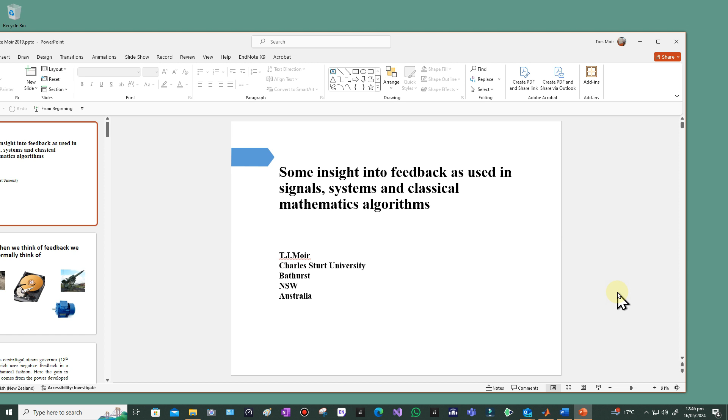Welcome back. I'm going to be looking into the link between many algorithms in use today, recursive algorithms used in a number of areas in signal processing, computer science, and mathematics, and the link to control systems using negative feedback. This is something I've been interested in for quite a long time, but I'm by no means the first person to have looked at this. The history goes back probably to the 1950s, but it doesn't get a huge lot of publicity, maybe because it's a control area that not everybody's interested in.

Let's think about control systems for a minute. When you think about control systems in the traditional sense, whether that be so-called classical control systems that you study in electrical or mechanical engineering, or so-called modern control systems like state space and so on, we normally think of things like hard disk drives, servos for very fast mechanical control, control of motors and machines like induction motors, and control of missiles, which gets into state space and nonlinear control.

That's coming from the early 1960s and late 50s. And robotics, more modern robotics, and walking machines that can run, jump, and do a whole host of things - that's what we normally think of. We think of these engineering applications because control engineering, or control systems, is normally studied by most engineers, even chemical engineers controlling processes for various chemicals, liquid levels, and the like.

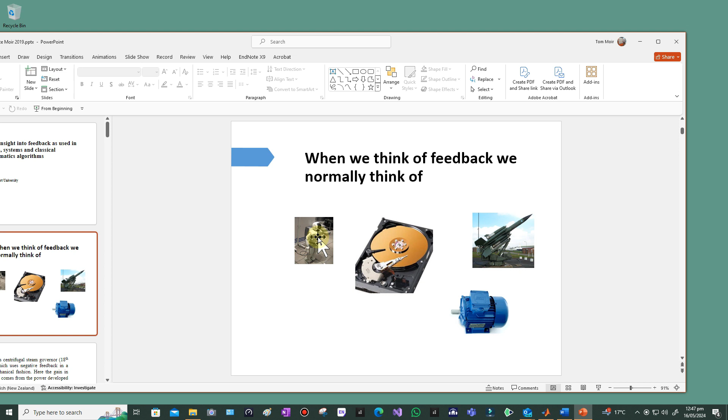But of course, control systems also appears in mathematics - it's just a theoretical topic. But what I'm looking at today is not the normal mathematics of control, but how mathematics itself has algorithms which turn out to be feedback control systems, even unbeknown to the people who invented them. So let's see what I mean by that.

Well, here's some more historical ones going way back. This is machines, the James Watt flyball governor, to control the speed of a steam engine. That's considered to be probably the first ever feedback control system, barring a clock, which has a regulator for the speed, of course. So arguably a clock could be before that. Watt also got this idea, I believe, from mills that were grinding corn and so on - there were similar sorts of ideas there, and this kept the steam engine at a constant speed so it didn't go running off. That's another story, however.

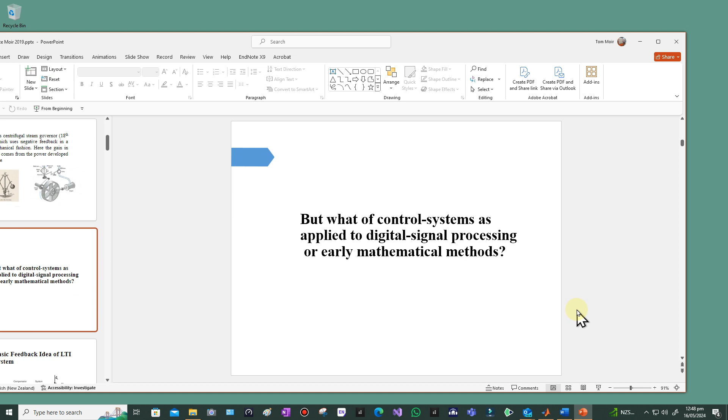So that's what we normally think about. Well, what about control systems applied to signal processing or early mathematical methods? So here's our normal control system. I've drawn this in discrete time in Z transforms. We can do the same with Laplace, or you could use j omega if you wanted to in frequency domain. So this is a linear time invariant system.

We've got our input and our output, so the output's trying to follow the input as closely as possible. We've got our system, whatever that may be, that we're trying to control, and we have to have this compensator, because if we just put feedback around it in a raw state, it won't behave the way we want it to. The output won't necessarily follow the input - it may try to, but it'll be perhaps too slow, so we want to speed it up. When we increase the gain to speed it up, it becomes oscillatory, so you've introduced another problem.

So we need to understand the science, the mathematics behind it, and that's of course where engineers at Bell Laboratories, among other people, designed methods like the Bode plot and other methods at the time, like root locus and Nyquist diagrams. But the Bode plot's still around and still very useful.

The D here is a disturbance that comes in, so if you're trying to control the speed of a motor, for example, this would be something trying to slow the motor down. There could be a ship steering system, and the wind's trying to blow you off course, and the control system has to keep the heading - that might be the heading here, going in that particular direction. What you'll find is that a lot of the algorithms we're looking at will have a system which is just a pure integrator with a gain, or integrators when it's a multi-system with multiple inputs and outputs.

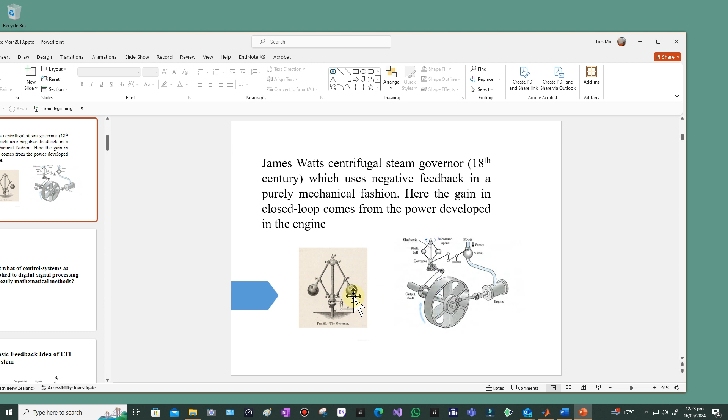The concept of feedback after the time of Maxwell, Maxwell was the guy who analysed, James Clerk, famous Maxwell with the electromagnetic theory, analysed the stability of governors back in the 19th century. It's a little bit hard to follow his paper because it's all differential equations. It wasn't using Laplace transforms, it wasn't algebraic, it was purely differential equations. But he does touch on things like closed loop characteristic equations, although he doesn't necessarily use that terminology.

Whereas Black was on the ball here with amplifiers. He, with his patents in 1937, understood that you could put feedback around an amplifier. What he probably didn't know at the time was how to make it stable. He knew that you could do this, and so you could get a predefined gain on an amplifier. On valve amplifiers at the time, you couldn't necessarily design stable gains. They'd sort of wander around with temperature and so on. That being the disturbance that we talked about earlier.

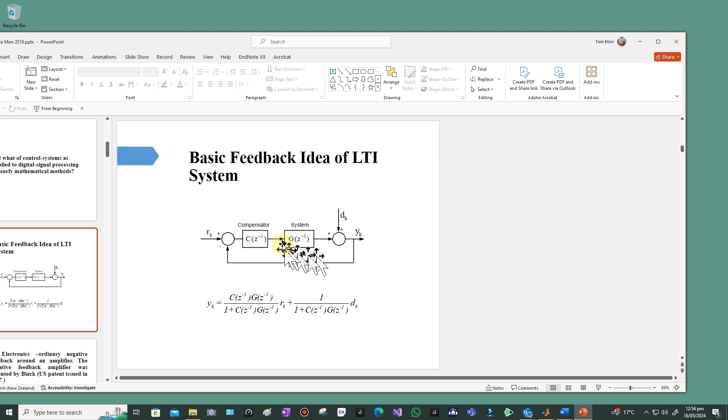This bit here has been the disturbance of the system coming in. So it's getting rid of also noise as well, because the noise reduces when you do this. So Black did a simple equation, this one here, to show that you get that. But what he didn't really probably understand too much is stability, and some of his colleagues like Bode and Nyquist sorted that out. Strange that they were all working at the same place.

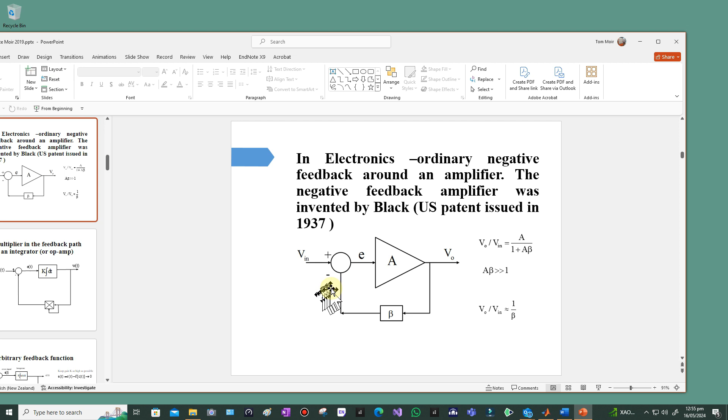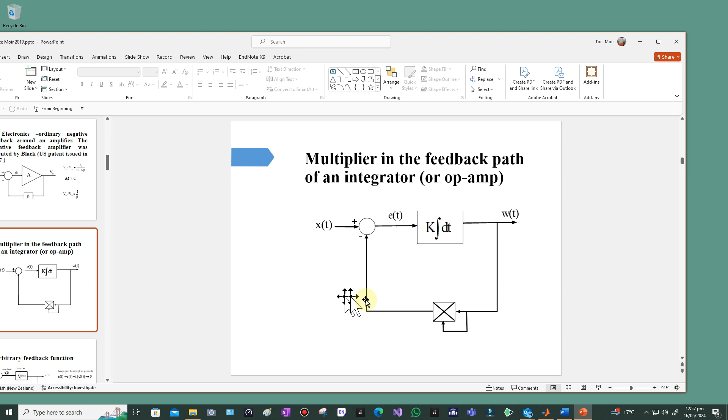And that's been known: any function in here, you get the inverse. The analysis is a very simple one. The error is r minus some function of the output, and you want that error to go to 0, like any control system, so that the output would track the input—but it's not actually going to track the input because it's not linear anymore. But anyway, if E does go to 0, then R must equal this function f of c of t, so c of t, the output, must be the inverse of R. So you get the inverse of the input.

So if you put a number in there like 2, you would get the square root of 2 coming out, and you do. So you could build an analog circuit which gives you the square root, and in fact that has been done.

I may even remember when I worked at GEC, them talking about a square root function for, I think it was one of these fast lifts or elevators to lift coal in a coal mine or something, to get it to decelerate, because it goes at a hell of a speed. To decelerate down to rest, they used a square root function. So it was analog in those days, so they would have used that. But being a student, I didn't fully understand all of that.

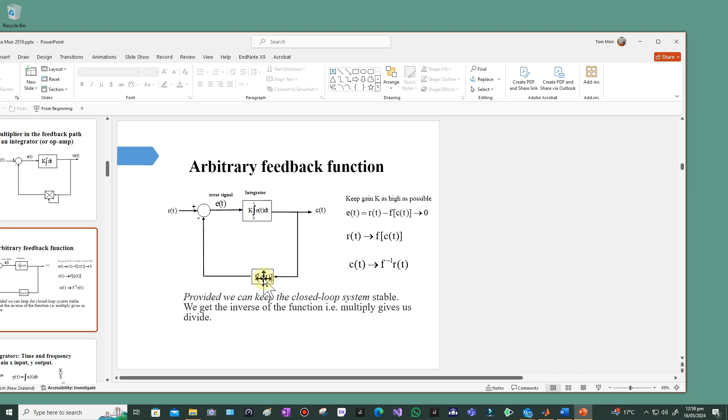K is a gain, which we can talk about later. It depends on the bandwidth of the loop and so on.

So what you actually see in real life is algorithms of this form appearing in the literature. You can spot them a mile off: Yk plus 1 equals Yk plus some kind of gain. Often that gain could be some other vector or something, and y could be a vector as well, times an error, and the error itself could be a vector or a scalar, or even a matrix of errors depending on the problem. So we can recognize integration very easily just by looking at algorithms like this—you know, hang on, that's an integrator, and that's an error, so that looks like a control system.

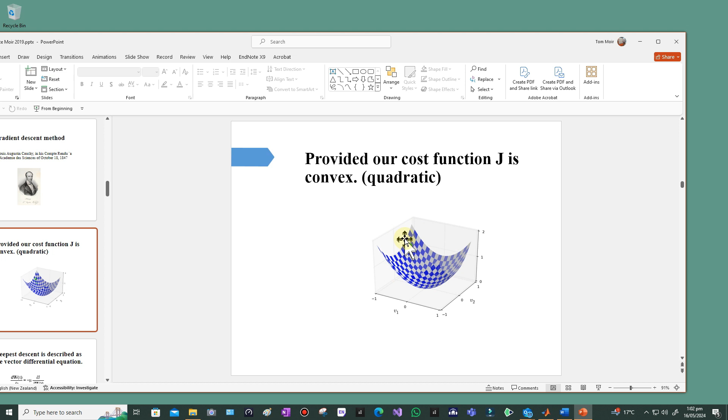It's a very short paper indeed, I think it's just about a paragraph really, almost like he didn't even want to bother with it. But it was on what's called the gradient descent method, and that's an incredibly important area nowadays with neural networks and artificial intelligence. These gradient methods work in a way I'll show you here: they find that you've got some kind of convex quadratic function, and you're finding the way down to the bottom to optimize the function.

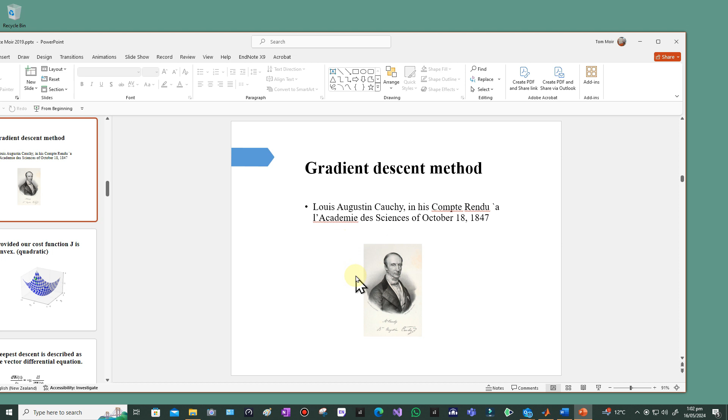This was invented by Cauchy, and he obviously never realized the importance of it, I think, because I don't think he pursued it that much. I might be wrong, but others, of course, did. This is the gradient descent method written in continuous time, which you don't really see very often: the rate of change of the output is constant minus a constant times the gradient.

This is often explained this way: if you're standing on a hill and there's fog and you're trying to get to the bottom, well, the best advice is probably just to stay put and camp overnight. But if you wanted to get down, you take steps, and where the gradient is steepest, you go in that direction, then take another step and look where it's steepest again, and you get down to the bottom the fastest way. I wouldn't recommend it because it could be a sheer drop and you end up dead. But anyway, that's the theory behind steepest descent, and it does work very well.

So this derivative is the actual gradient of the function you're trying to go down, and it's approximated by a differentiator, which can be approximated by this Euler integration: wk plus 1 minus wk over T. Again, if you've implemented a PID controller, you'll recognize that it's a first difference, the simplest form of differentiation you can get. You can get more complicated approximations. T is the sampling interval, and we normally make that 1 because unless we're looking at it as a real control system in terms of frequency and bandwidth, it's normally all normalized to unity sampling.

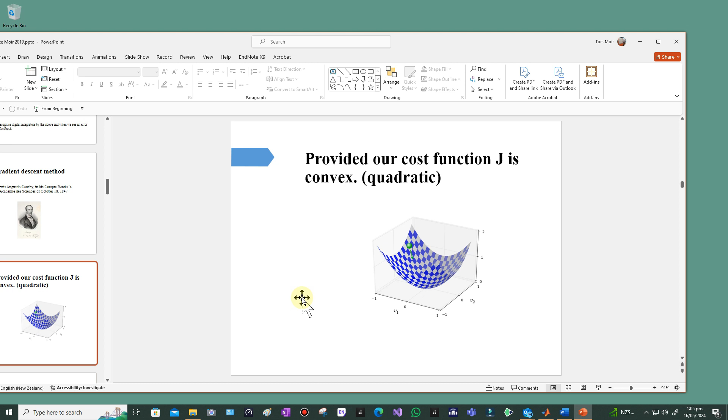So this is the discrete version where you normally see it: wk plus 1 is wk minus mu, and mu is like a gain times the rate of change of the output, which is the gradient. You've got to watch what that mu is, because if you make it too big, that's like having too big a gain in a control system, and it goes unstable. And once again we recognize integration here, because we've got this wk plus 1 is wk plus something. Unlike a simple integrator which is a scalar, here this is the whole vector, or it could be a scalar as well.

But that's the steepest descent method, and it's obviously a control system. Just by the way, you can replace that differentiator with a more accurate differentiator, the trapezoidal differentiator, giving trapezoidal integration. It still looks very similar, but you've got an extra term: dj by dw, the cost function derivative, and dj by dw k minus 1, the previous version. You do get a slight improvement doing that, but to be honest, it's not an enormous improvement.

So obviously with gradient descent, you've got to be careful because the method of steepest descent is not the same as gradient descent—I think that's another thing in mathematics. So we call it gradient descent, really, and it's really this integrator with feedback around it. If you can actually do some analysis, it's just a control system, and we'll come to that again.

Here's another common control system used a lot in signal processing: the least mean squares algorithm from 1960, or the stochastic gradient method. It's based actually on steepest descent, on Cauchy's work, but a slight extension of it, made by Widrow and Hoff, I think it was, in their paper in 1960. So you've got to understand it, it's a little bit tricky, but basically all we're doing here is we've got an unknown system G, and we're driving it with some known input, let's say white noise. I'll explain in a minute why it's white noise and not just any other input.

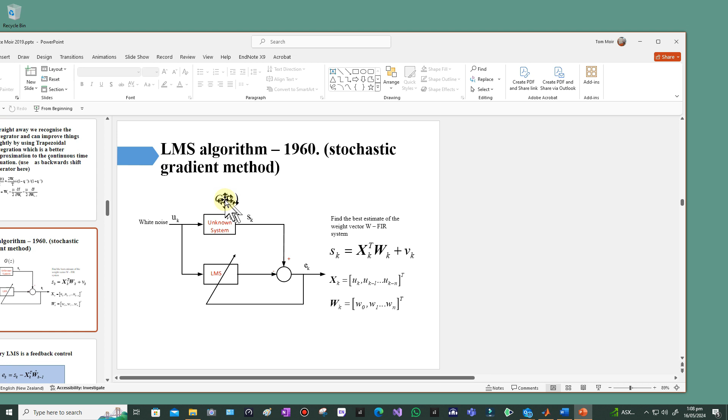There's a whole load of analysis around what maximum value to make that. It's quite interesting - a lot of people just pick a small value. But if the system itself is changing with time, in other words this unknown system's parameters are changing, then that can lead to problems if mu is fixed.

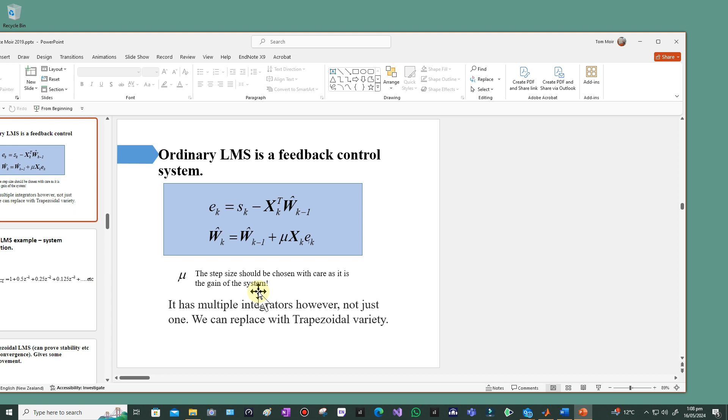Anyway, we've got an error and we've got an update, which we've got an integrator in the loop again with feedback around it. I'll just briefly show you a simulation of LMS - you probably find that in lots of other videos, but here's the least mean squares.

Here's an unknown system, 1 over 1 minus 0.5 z to the minus 1. And if you do, say, long division, or a power series expansion, you'll find that can be written like this: 1 plus 0.5 z to the minus 1, plus 0.5 squared, 0.25 z to the minus 2, plus 0.125, and so on. It gets smaller and smaller and smaller. That's how you can approximate a so-called infinite impulse response filter into a finite impulse response filter.

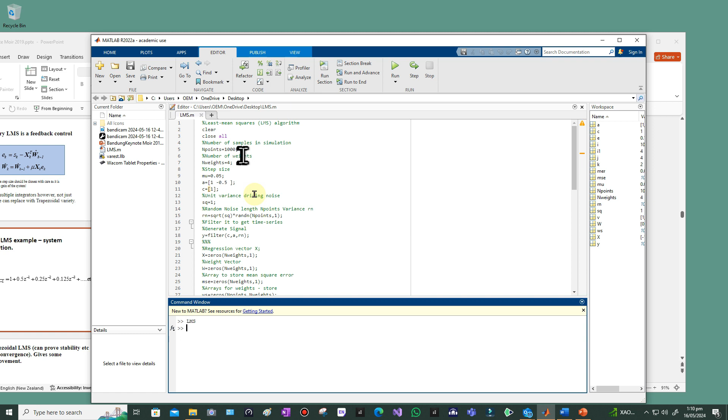So I'll just type LMS and see what should happen. So this is the error - like any good control system, it's going... well, actually it's the mean square error, not the error. Sorry, I'm going to be careful here. It's a mean square error, not the error itself, because the error actually is positive and negative. So it'll look more like something oscillating between positive and negative and going down to close to 0.

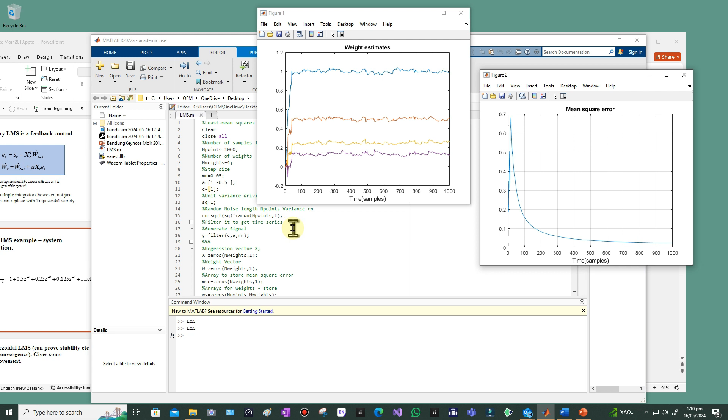Here's our so-called weights: 1, minus 0.5, 0.25, 0.125, and so on. We can make these smoother by decreasing the step size. I've just made mu - I don't know what I've made it, 0.1 or something like that. I can increase the number of weights, so we approximate it to a larger degree. Let's make it 8 and see if it takes that.

Still working, and you see it looks smoother there. There's 8 values now. The reason for that is because as you increase the number of weights, the optimal value, the maximum value for mu, goes down, and so you get a higher overall gain in the loop. The loop gain is determined also by the number of weights, and so that's why it looks a little bit smoother, because it's got a higher bandwidth, if you like, in the loop.

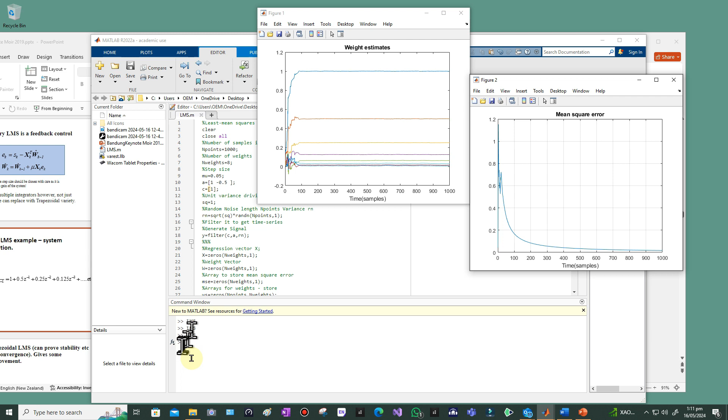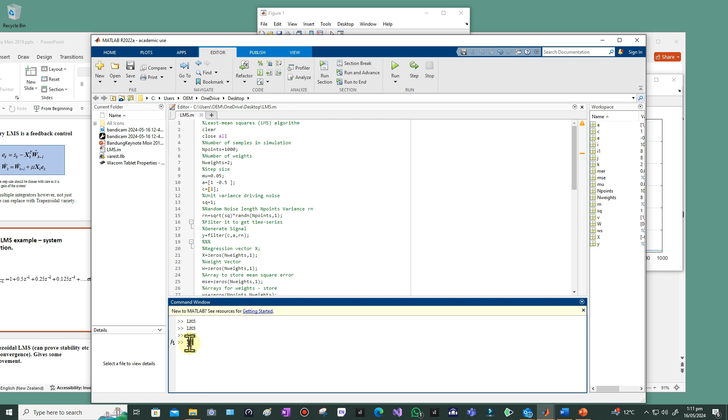And if I reduce the number of weights, it would look more noisy. So if I made it, let's say 2 weights, so it was only 1 and minus 0.5, it should look quite a noisy estimate. Yeah, there it goes - it's quite a noisy estimate.

But on the other hand, I could, if I was to increase mu, make it say 0.1, that's much bigger, assuming it doesn't go unstable.

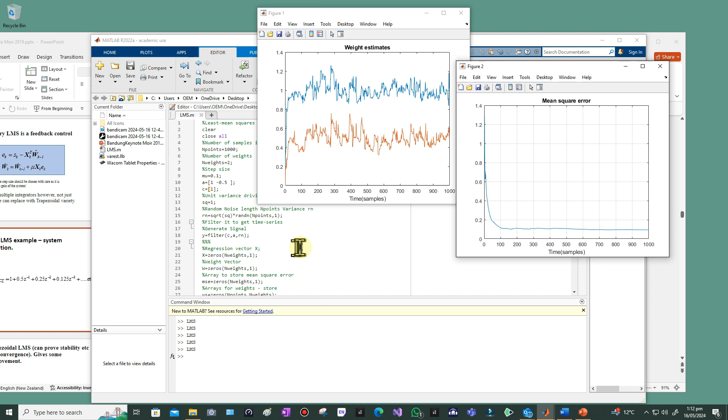Then it should... actually I made it too big there. That's what happens when it goes unstable if I make it bigger. We'll make it 0.02 or something like that. Oh, I can't remember what it was before.

0.007, let's say. Should actually be smoother. Oh, it's not actually going to get very smooth. If I make it very, very small, on the other hand, it will definitely get smoother. Actually, that's what I should have done.

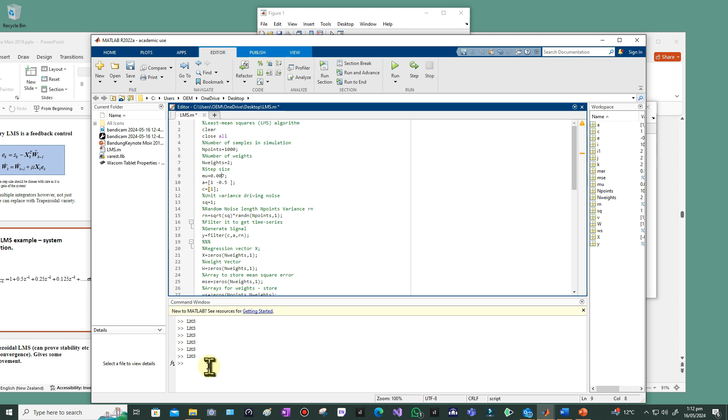But it might not converge in the time given, because I've only given it 1,000 samples. Ah, there we go, so it's much smoother there. Increasing it is the wrong thing to do there.

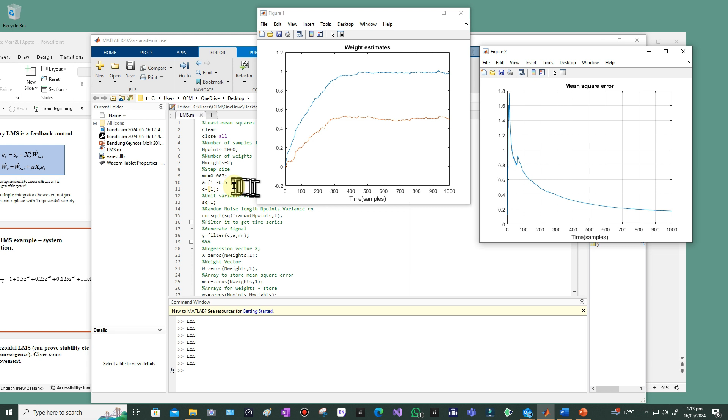It would make it faster converging, but not necessarily smoother. So you've got to watch the value of the gain, and there are ways around this by using what's called normalized least mean squares, where it kind of normalizes itself, and you don't have to worry about selecting the value of mu. I've implemented this in real time a number of times, and you have to be very careful unless you use the normalized version, where mu varies. You are in danger of being unstable.

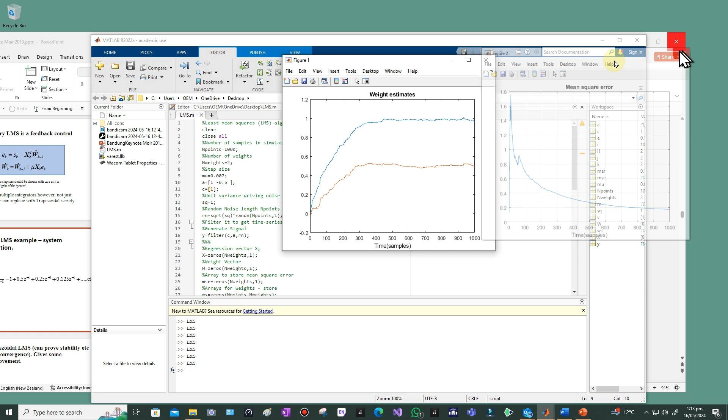So LMS is a kind of control system with all sorts of variable things in it. This is an extension to LMS, where we've put a trapezoidal based integrator in rather than an Euler integrator, and you notice you get an extra term on there. I published this back in 2010. It doesn't give you a huge advantage, to be honest.

I have got a paper written on that here somewhere. Let's have a look.

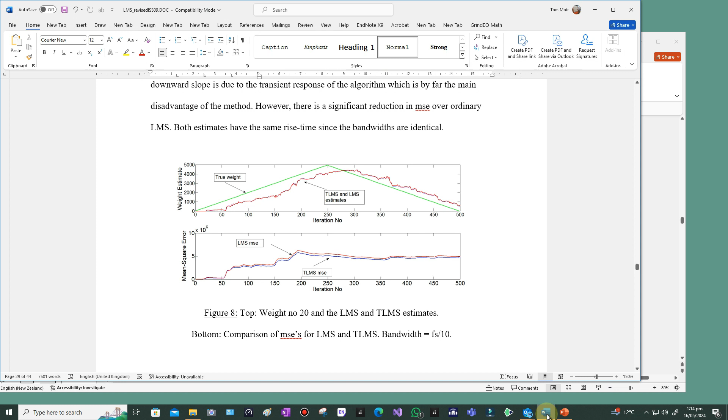Ah, yeah, so you only really notice the difference when you've got time varying weights, really. If it's constant weights, you don't notice the difference. I'll come back to that.

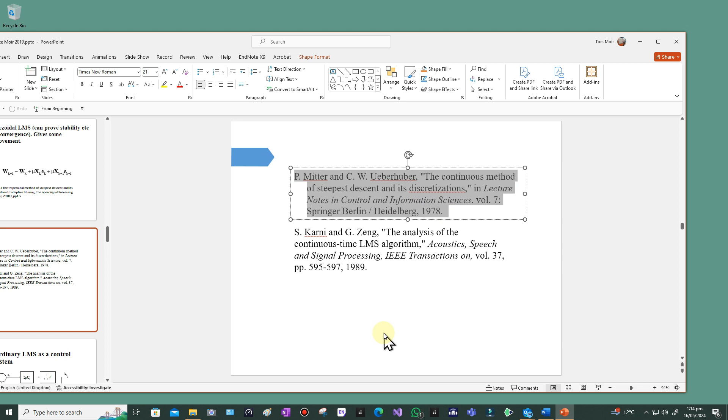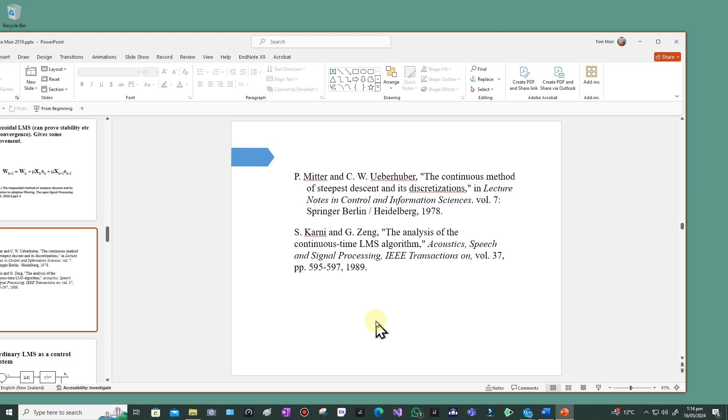So this was somebody who realized back in 1978 that LMS could be written in continuous time rather than discrete time. And somebody analyzed it in 1989. I had a go myself, and I came up with this block diagram for LMS.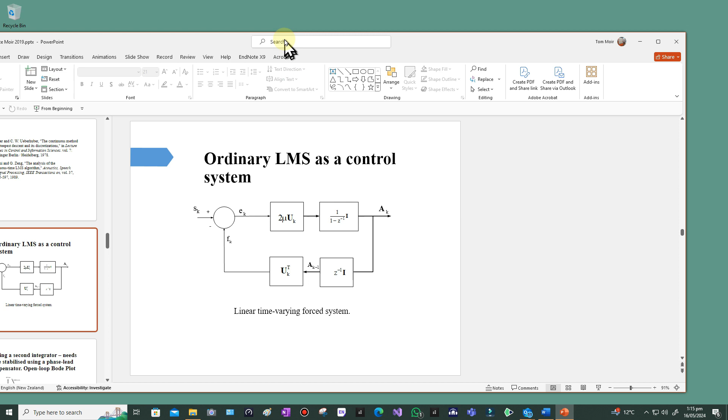What you can do is compensate the system like a normal control system to get better performance. But what better performance would you actually want? That's the question, what are you trying to do. Would you want to try and make it faster? You can't really do that, but what you can do is make it better at tracking time varying weights.

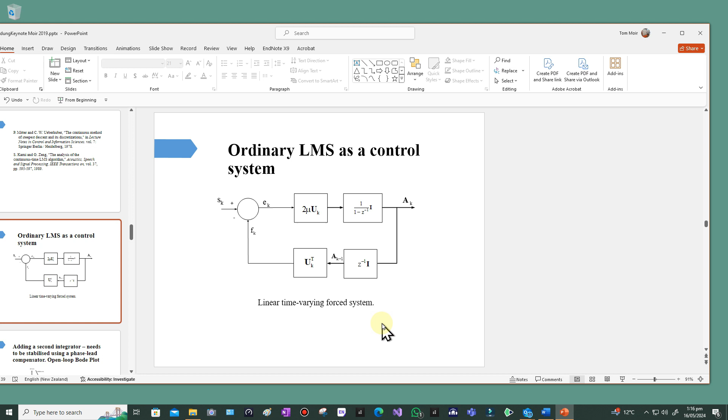Time varying weights isn't quite so common when you look at the literature - they normally have constant weights, but in real life systems can vary all over the place. I was looking particularly at difficult cases where the weights were changing in a ramp formation, and that was deliberate, because control systems can follow steps, ramps, and perhaps parabolas, and how they do that depends on the type of the system, whether it's type 0, type 1, or type 2. So I deliberately picked difficult types of weight variations.

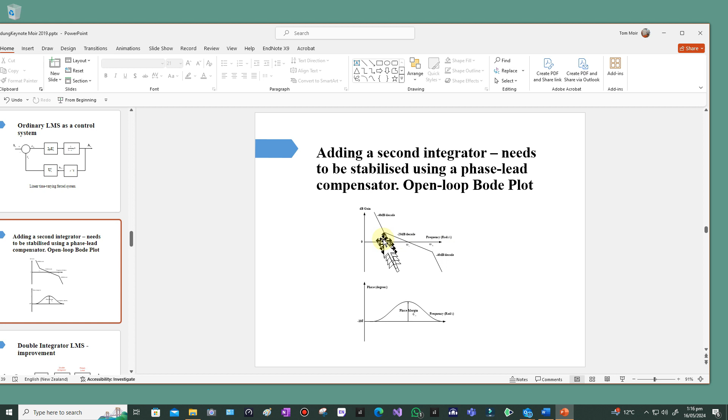So you can add a second integrator to the loop, and if you stabilize it, you stabilize it in this way. This is called the symmetrical optimum, where you have two integrators, then one integrator, then two integrators. So you have minus 40 dB per decade, minus 20 dB per decade, and minus 40 dB per decade, and you get this is our bandwidth here, where you cross over frequency, and you get a maximum phase margin of 55 degrees or so, depending on the ratio of upper to lower frequencies.

That's called the span ratio. You can read about that in my book called Feedback, by the way.

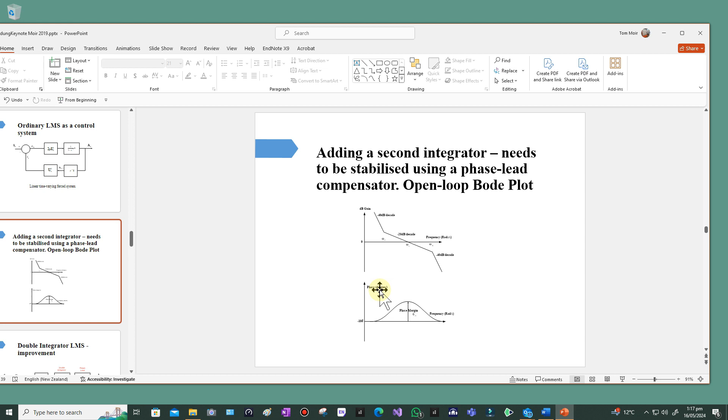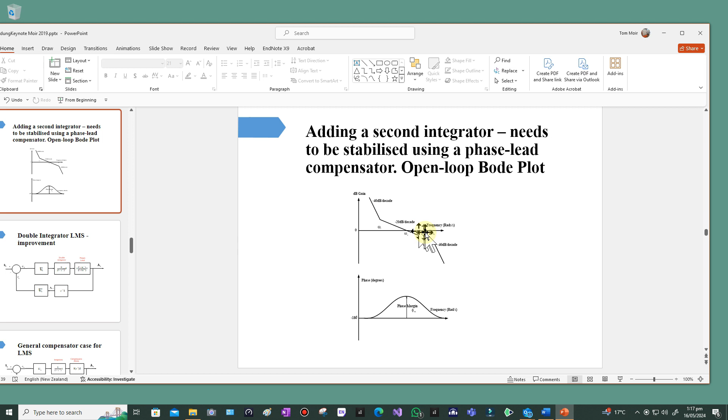So we end up with double integrator LMS, which is kind of an improvement - I'll say kind of because it's got disadvantages as well. What we've done here is instead of one integrator like an ordinary LMS, we've got double integrators here, so there's 1 minus z to the minus 1 squared. I don't know if you can see that. And then I've got a phase advance, that's what's doing the moving from minus 40 to minus 20 dB per decade. Everything else is the same.

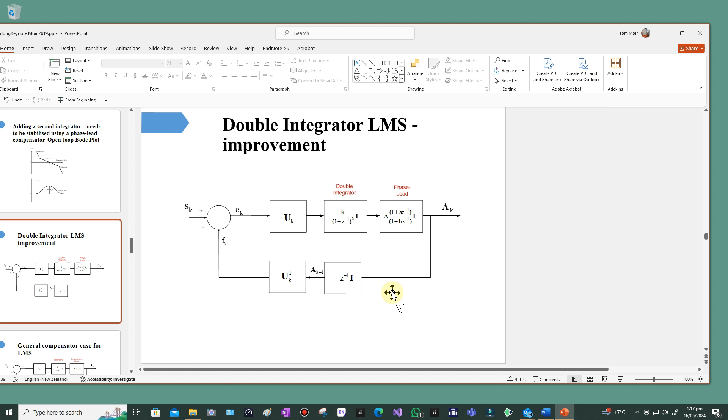Another author didn't look at double integrator LMS, but looked at more compensators of this form - a famous guy called Glover, in 1979, wrote on high order algorithms for adaptive filters in the IEEE transactions. And actually that makes a lot of sense, because when you have two integrators, it's quite hard to control it, and if you're not careful you can end up with oscillations and so on.

I can show you some simulations of that. This is with a 20th order FIR system - you're trying to estimate 20 weights which are all ramping up and then ramping down again. So if this is the 20th weight, just to give you a good example, that's ramping up, ramping down.

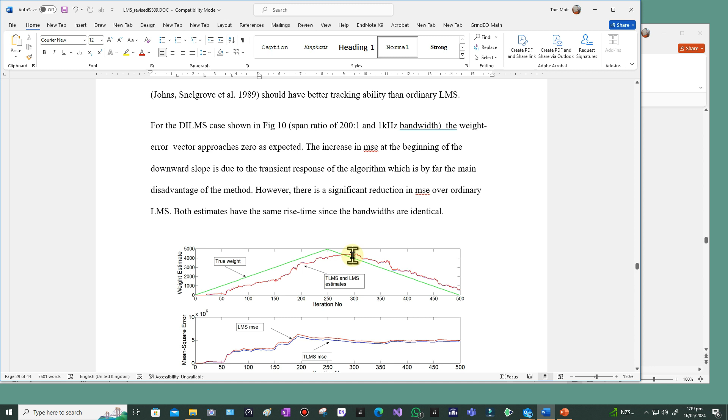LMS and the trapezoidal method behave very similarly. They can't really track it because that's a type 1 system, and a type 1 system with a single integrator cannot track a ramp. If you remember from your basic controls theory, you need two integrators in a loop to be able to track a ramp. The trapezoidal LMS gives you slightly less mean square error, but not a huge amount. But notice, this is classic - it doesn't behave like a deterministic system where you'd normally find a constant error all the way, because it's random inputs, so it's not quite like that.

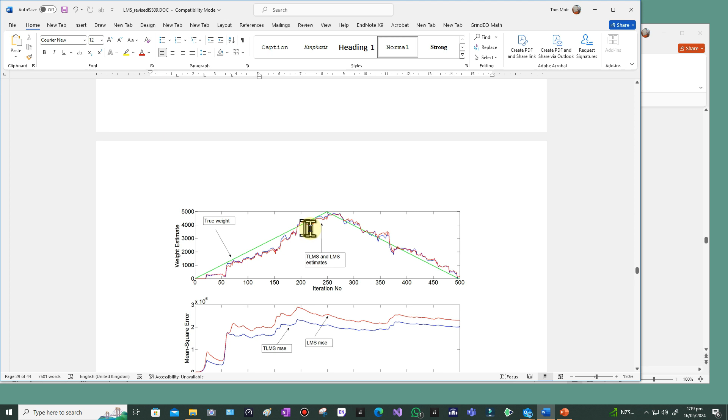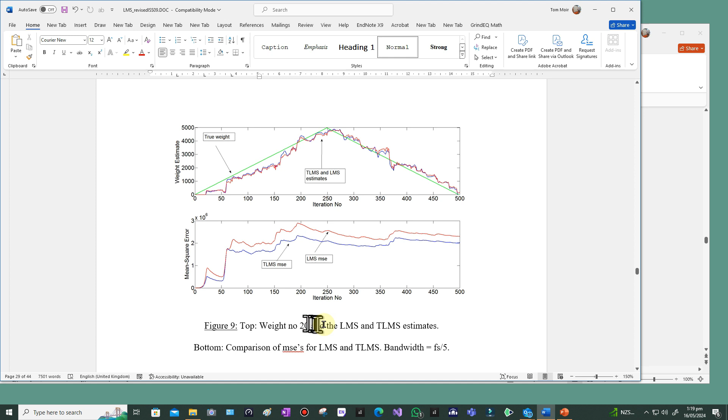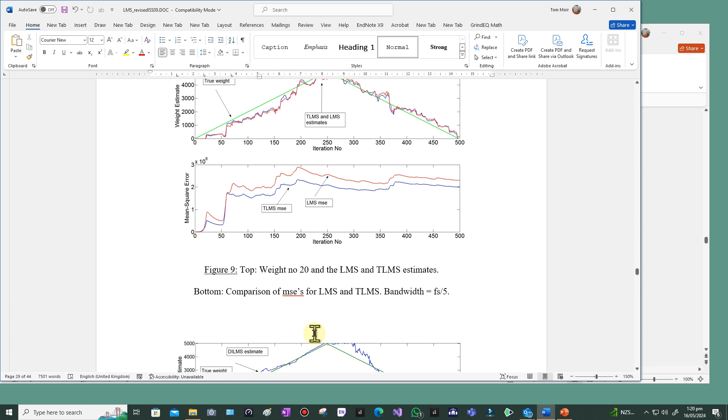But what happens when you put two integrators in is, well, there's still an error, but it does track it much better, particularly here on the downward path for some reason. So, where's the double integrator one? No, oh sorry, this is not double integrator - this is just, I've increased the bandwidth. So this is with a higher gain of the loop. But when you put two integrators in, here's the one.

Then you're ending up sometimes, at least, with DILMS - that's double integrator LMS - ending up with a zero error, but it's not all the time, so it doesn't behave quite like a deterministic system, where a deterministic system would have an error and then it just sort of makes its way to zero. It hasn't had a chance quite to settle down because the weight's changing in the other direction, so it's wobbling about and making its way down to a smaller error there.

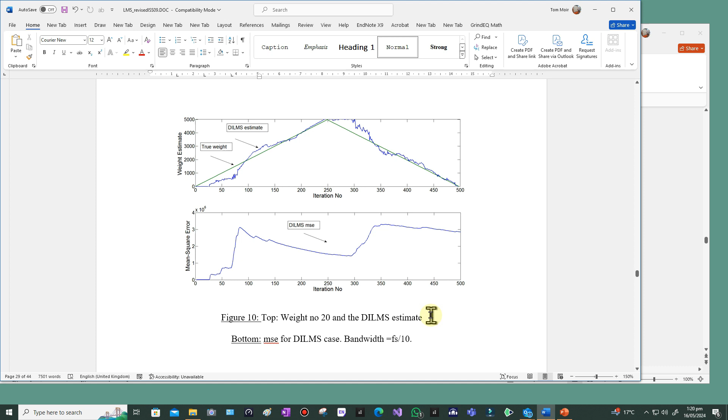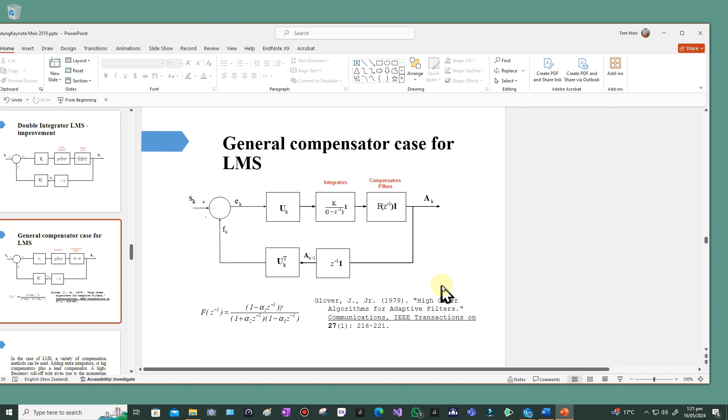So that's with two integrators. You can see how you can improve the loop, but for a lot of practical problems it's really not of great use. It's of great theoretical importance, I think, but not of much use in a lot of real problems because of the stability issues - you really need to keep it stable. There are lots of...

This is just explaining there are lots of ways of compensating in the classical sense. First of all, you can have just a pure integrator in a loop, and that gives you 90 degrees phase margin - it's got minus 90 degrees phase, so it's 90 degrees phase margin. It's perfectly stable. You can stick on a roll-off at high frequencies.

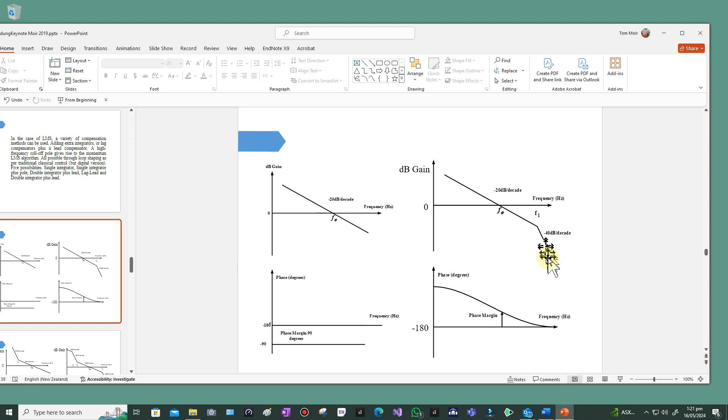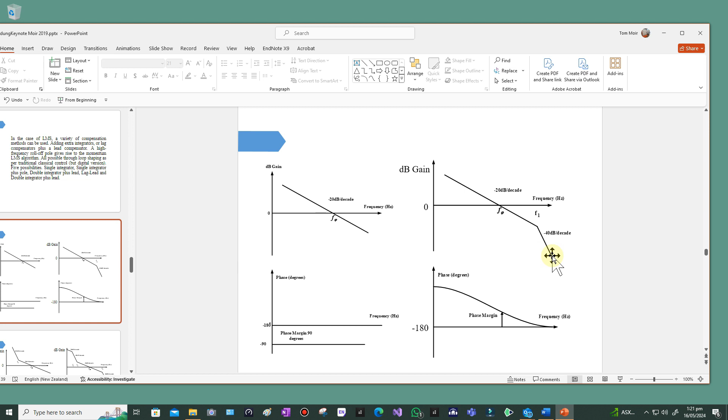This is like a pure lag here, a pole at high frequencies, and that reduces the phase margin, but it would reduce the noise at high frequencies, any noisy terms. That's called momentum, the momentum method - you see that in many papers. They introduce a momentum term, an extra term in their algorithm, and it turns out that's what it's doing actually - in engineering terms, it's putting a low pass filter there at high frequencies, so it should improve things but decrease the stability a little bit.

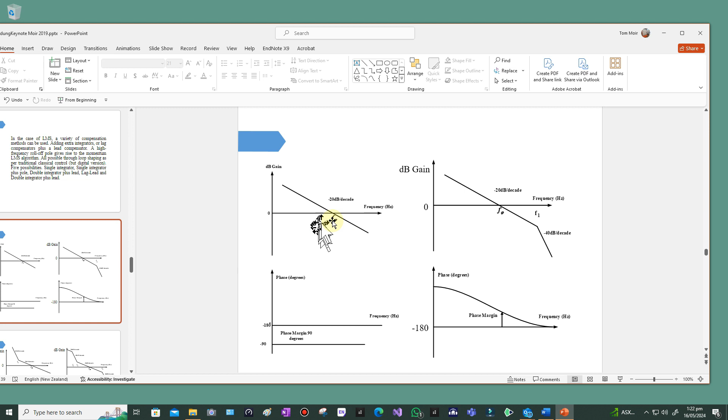And you've got to watch again for your weights here. This is analog, so there's no restriction on bandwidth for a pure integrator in theory. In a discrete system, you're limited by the half sampling rate, so you can't just increase the gain and make the bandwidth anything you like. The bandwidth here needs to be something like, realistically, maybe a tenth of the sampling rate. So if you sampled at 10 kilohertz, you might make the bandwidth 1 kilohertz, and the half sampling, the Nyquist frequency, is 5 kilohertz.

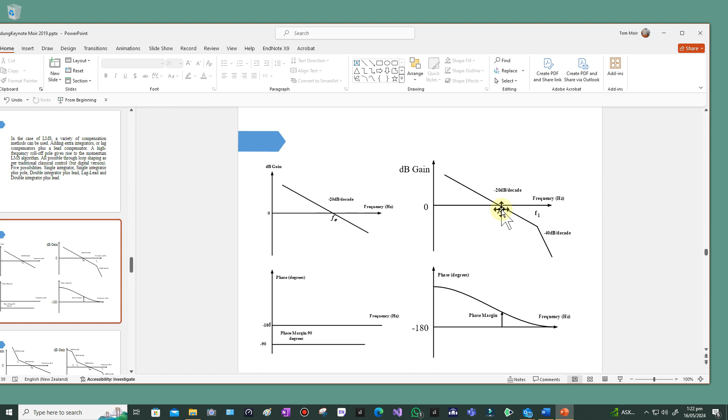Then other things you can do, like here, you can put in a PI controller, so you can increase the gain at low frequencies. This will enable you to follow ramping type weights, which are more time varying problems. You won't get any advantage at all if the input is constant, because with a pure integrator you get zero steady state error anyway. Two integrators you get zero steady state error, exactly the same - in fact, you probably get slight overshoot maybe even with this.

But if you're tracking something that's ramping or changing with time, a PI controller is not a bad idea. You can do something similar. This is here up to this set of frequencies. This is very similar, but then it goes down. It's minus 40, then it goes to minus 20. So that's putting in what's called a lag compensator. If you look in the control textbooks from the 1960s and 70s, you can look in my book as well. That's a lag, and then this bit here is a lead.

So it's a lag-lead compensator, sometimes used in amplifier design and so on. A lag-lead is like a PID controller a bit, except it's not a pure integrator at low frequencies. You see, it's minus 40 dB per decade, but then it cuts back to minus 20, so it's only got one integrator down at low frequencies, whereas this has got two. But they can be made approximately the same, not quite the same.

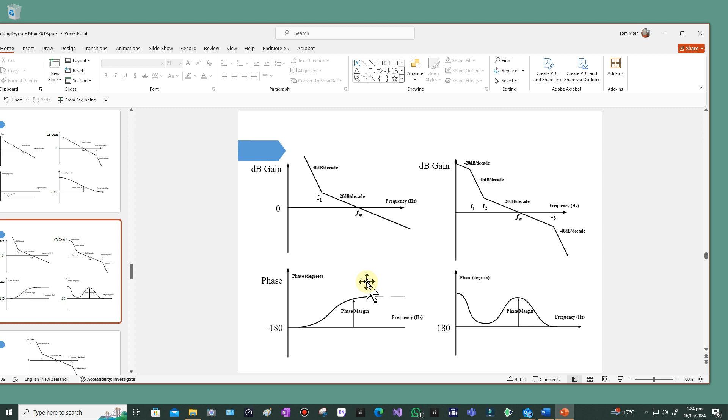And then there's this one, which is probably the one I recommend for sort of motors and things, because when you've got resonances and stuff here - we're not dealing with motors, we're dealing with computational algorithms. So this has got minus 40, minus 20, minus 40. It's the one I mentioned earlier, and that's the one I used when I was showing you the two integrator method in LMS.

This span ratio, the ratio between W high and W low, determines the phase margin. It's usually, if that's about 10 to 1, phase margin is about 55 degrees roughly. If you make it lower, then you get a higher gain for a given bandwidth. Here, at the crossover frequency, you get a higher gain if you make the span ratio lower, but in doing that you reduce the stability because the phase margin goes down.

When you're comparing these algorithms, a mistake I think a lot of people make is because they don't look in the frequency domain, they don't compare like with like. You've got to compare with the same crossover frequency. Just like here, if you are comparing these two systems, you must keep f phi, the crossover frequency, the same in both cases, and then you check it for disturbance rejection properties and so on.

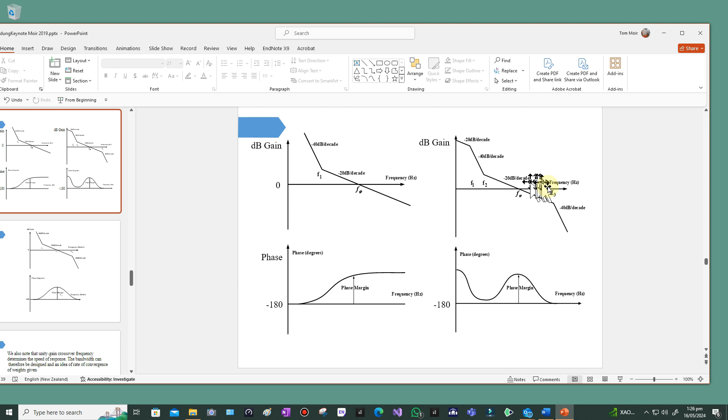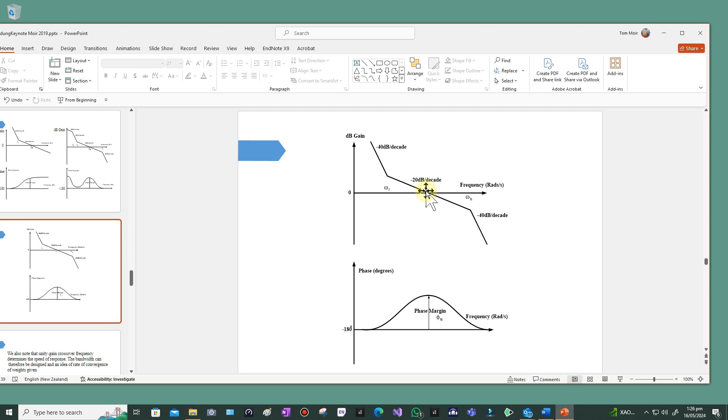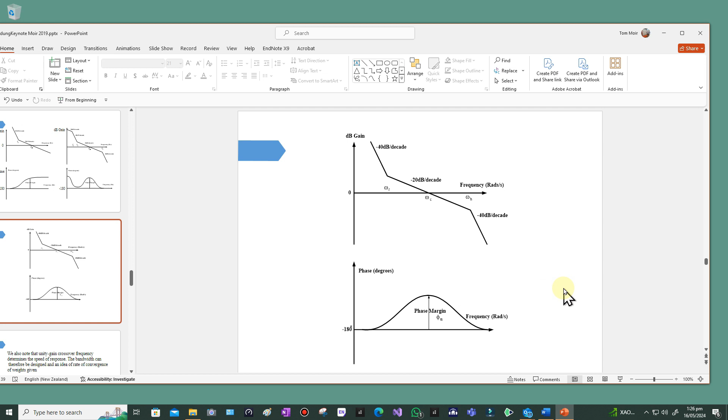So the speed of response will be the same for both of these. It won't be any faster, that one. This one has the ability to be faster, however, because you can increase the bandwidth a bit without running into trouble with the phase margin, whereas here, if you increase the gain, and you come down at -20 here somewhere, then the phase margin will be reduced - let's say it cuts here as the crossover. Likewise with this one, if the gain's not sitting exactly where it should be, you're in trouble either way. If the magnitude came too low, the phase margin would be down here somewhere. If it was too high, it's up here. So it does present a problem, even though it's interesting to check the theory that in fact that's how these algorithms do behave, just like a control system, even though they're time varying and so on.

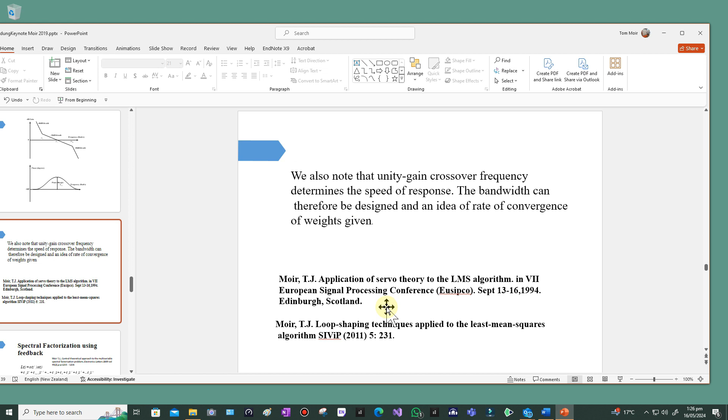As I've just said, the gain crossover frequency determines the speed of response. And this is a really old paper here.

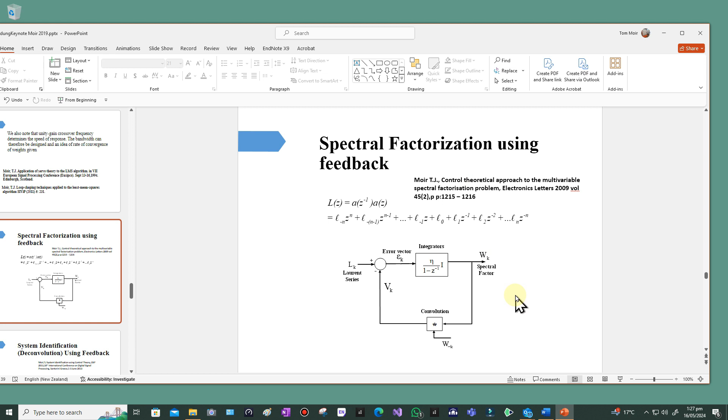You can do, with feedback, you can also do spectral factorization. I looked at that - those of you that are into Wiener filters will recognize that. This is called a Laurent series. I had a paper on that. Some other authors questioned the convergence of it, which was interesting. But it's like a lot of these things, like even in Newton's methods, which have also got errors in them, of course, and an error term like in feedback - they're not guaranteed convergence either. So not all these methods are guaranteed convergence. But the LMS, of course, is, because it's provided you keep the gain below a certain amount.

You can also do deconvolution, but it's not very successful either, because it doesn't take account of the noise in the system. It's for deterministic systems it works, but nothing's really deterministic, nor noise free. So this is convolution, and if you put the system in, if you do a mirror of the FIR filter here and put it in the feedback path, you end up with the opposite of convolution - so convolution is in the feedback path, and you end up with deconvolution, which the control loop forces the opposite. Just like I said earlier, whatever you put in the feedback path, if you can make it stable, you get the opposite, but you have to make it stable.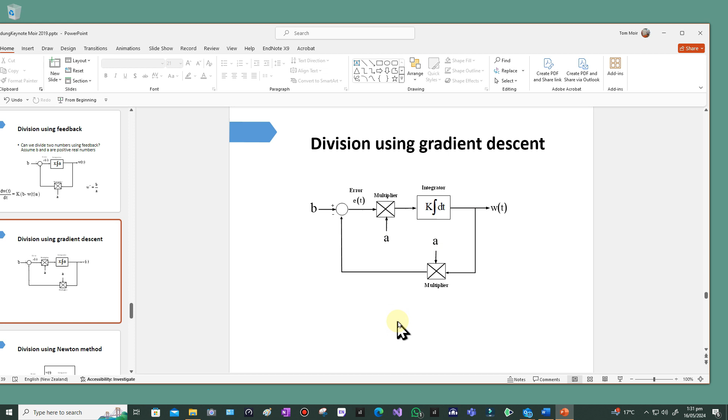You can use Newton's method, and you'll see that Newton's method turns out to be a control system as well. But it's got this strange feedback from the output feeding back into the error, which you'll never see in a normal control system, at least I've never seen it, but you might think of it as some kind of nested loop within the loop. I suppose you can see it, but it's not got a summing junction, it's a multiplier in there.

And that gives you the fastest convergence because it's quadratic. That means the error goes down, for every step, when it's in discrete time, as the square of the previous error. So if it starts with an error of 0.5, it goes to 0.25, 0.0625, and so on very quickly. You can extend this to higher order methods, a sort of extended Newton, where you can have quartic convergence and end up with multiple loops and so on.

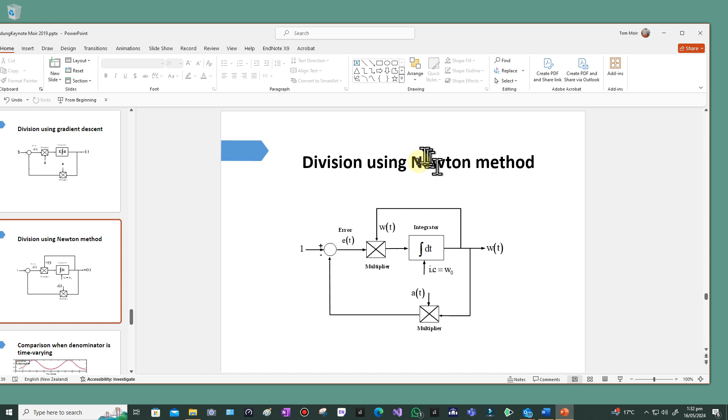But here we can investigate tracking with the gradient method. This is the control method, just with straight feedback. And this is division, 1 over a time-varying parameter, so this is the A term, varying with time. It's got to be offset because otherwise it can go unstable with one of the methods, so I've had to make it always greater than 1, the A term.

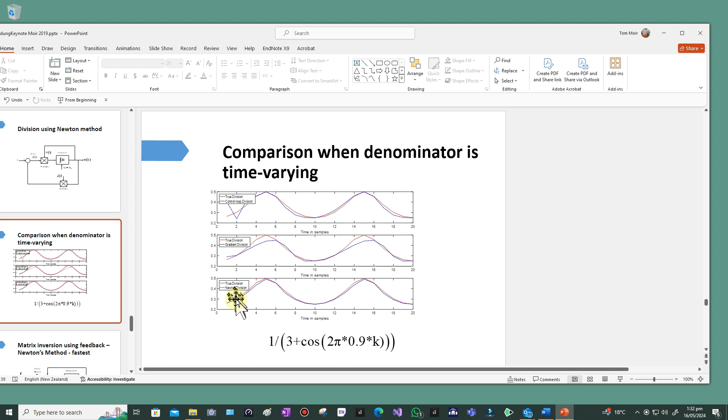But just to see which is the best, it goes without saying that the Newton method here has the smallest error, the best tracking. You can see the Newton method is the blue here, and it follows nicely the true division, the true value of 1 over 3 plus cos 2 pi times 0.9k, which is the red, and it's tracking it really well.

The gradient method due to Cauchy is a bit slower, you see, it doesn't quite keep up with the Newton method. And the control method actually is surprisingly not bad, it looks almost as good, doesn't it?

It shouldn't really be. The trouble with the Newton method is you've got to be careful of the initial conditions. If you don't start it off in the right place, it'll diverge, whereas the gradient method doesn't care about that, and the control method doesn't care either. But the Newton method should generally give you a lower error, you can see it is a lower error.

When you've got time varying inputs, that's when these methods come into their own, and you can see another way around solving the problem. Not when everything's constant - then it's just the classical mathematical approaches, and you use the usual methods. But in a lot of engineering problems, we're dealing with matrices that are varying with time.

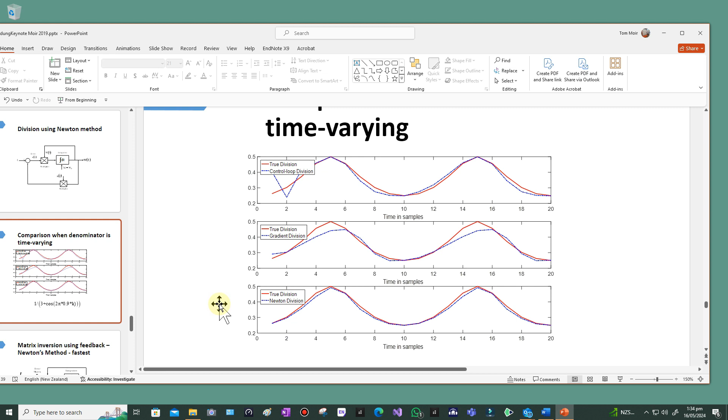Due to inverse kinematics and whatever, you're trying to invert matrices. Mathematicians have a fit when you say you're trying to invert a matrix, even though they've developed all these methods for inverting matrices. The last thing they want you to do is invert a matrix, especially when solving a set of linear equations - they prefer other methods. Direct inversion is considered a big no-no, but engineers perhaps don't agree.

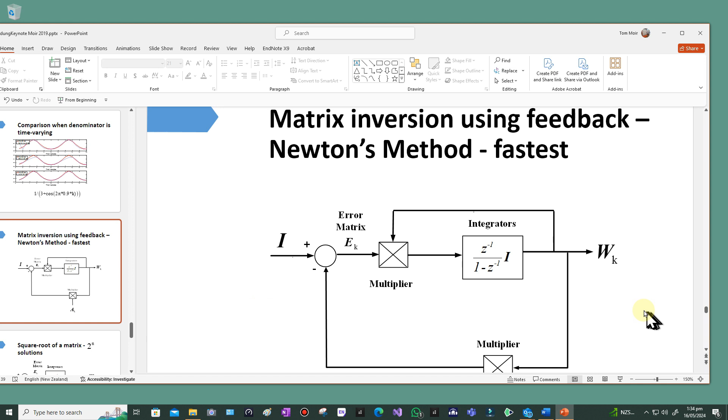So we can do the same. We can invert a matrix using feedback, which is quite interesting. Instead of 1, this is an identity matrix going in here - it's actually an error matrix here. We've got our multiplier feeding back, and these are an array - it's a diagonal array of integrators.

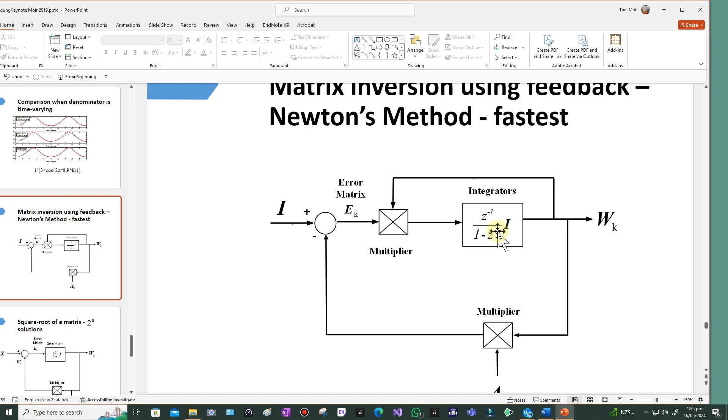As many as the order of the matrix. So if there was a 2 by 2 matrix, you would have 2 integrators on the diagonal terms - a 2 by 2 matrix with, on each of the diagonal terms, would be a single integrator. So it's z to the minus 1 over 1 minus z to the minus 1.

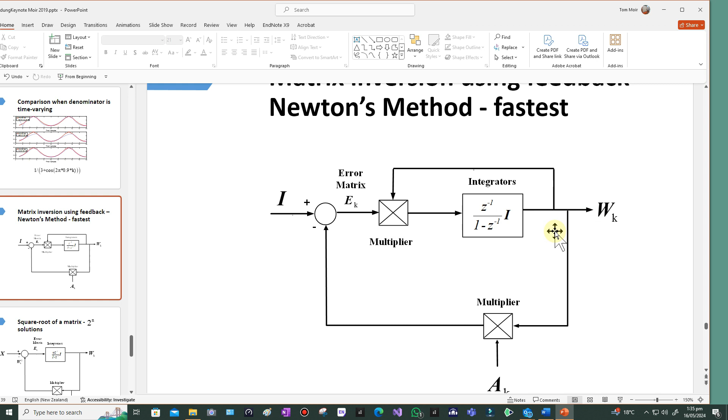The z to the minus 1 is for physical realizability. In a discrete control system, you need at least one step delay between the input and the output. A computer can't respond instantaneously - it needs at least one sample. It might seem instantaneous to you, but it's not like analog. You could do the same with analog.

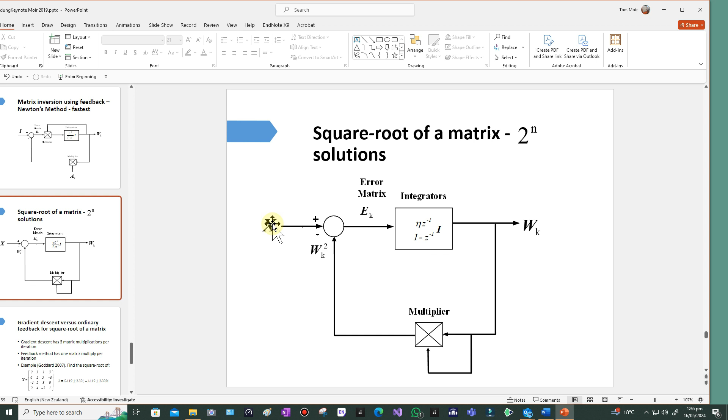You can also take the square root of a matrix. I've written a paper about that as well, where you put a multiplier - you multiply, here you've got a matrix X, and W should converge to the square root of that matrix. In the Newton method, there's no step size, because the Newton method doesn't kind of need a step size - it's kind of optimized, it just doesn't need one.

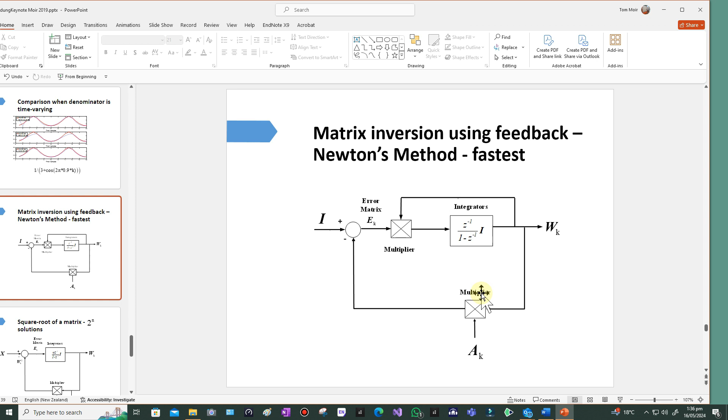It's kind of unity step size. But for this method that I developed, it's just a straight square in the feedback path, like the square root function we saw earlier, but with a matrix. So we get W squared, that's W times W - not W times W transpose, it's W times W. And you end up with an error matrix, and W should converge to the square root of the matrix.

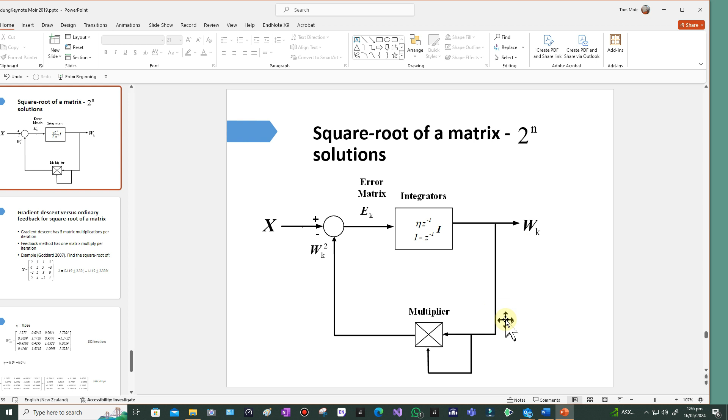So the concluding remarks are that feedback has been used in mathematical algorithms since the 19th century, but people, I don't think, have really recognized it as a control system. You see an error and you think, well, it's just an error, but if you look at it from a different point of view, it is a control system.

So recognize feedback when you see it, because when you see this type of algorithm, WK plus 1 is WK, that's got negative feedback, which is recognizing a forward path integrator or integration. It can be arrays of integrators, as we've seen, and it's possible to compensate a little bit at least. And it's perhaps more important than it looks, because a lot of modern algorithms use these kind of approaches - we'll see gradient type algorithms emerging, based on gradient descent, some quite sophisticated ones, and they've all got the same kind of thing: an error, an integrator in the forward path, and you can treat them like a control system, and you can compensate them.

You can take it to the next stage as well. You can look at it in an engineering sense at the bandwidth of the control loop, perhaps even as well, which I was doing with LMS. And you can therefore, when you increase the step size, instead of just saying I'm increasing the step size, realize that what you're doing is increasing the bandwidth of the loop of the integrators, and therefore that makes it faster if you look at it from an engineering point of view. So there's a number of insights there, which I think is quite interesting.